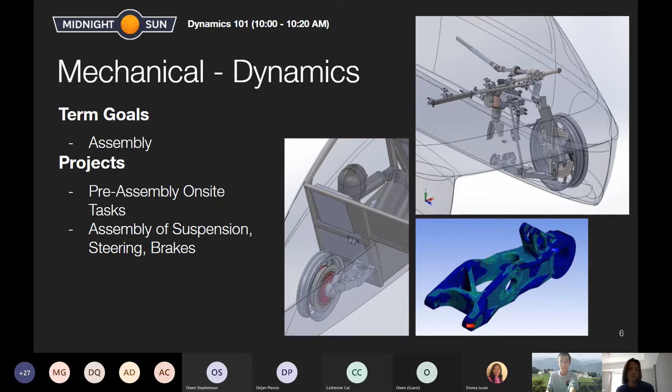I'll provide a brief overview of the 3 subsystems I mentioned, starting with suspension. What is suspension? It's a mechanism that controls the movement of the wheels vertically using linkages and a spring damper. The spring stores the impact temporarily and re-releases it, and the damper takes the kinetic energy from the bump and transforms it to heat, so your car isn't just bouncing up and down all the time.

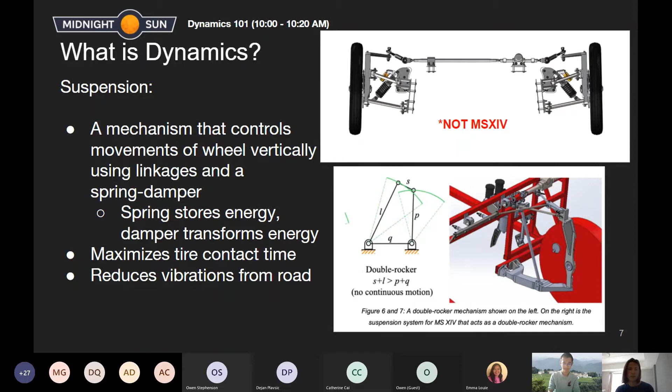We can go on to the next slide.

So then steering, obviously, is important for obvious reasons—it controls the direction of travel of the vehicle. Basically, the steering subsystem is just a long series of linkages of interconnecting arms, quite similar to the animation shown in the top right here. It uses a rack and pinion and then linkages to transform the rotational energy of the steering wheel into rotation of the wheels themselves.

The geometry of the steering is calculated in such a way to get hopefully as close to an ideal turning radius as possible. The mathematics behind it are actually a bit more complicated than you might intuitively think, because the outside of the car has to travel further than the inside of the vehicle. So the turning radius, and therefore the amount each wheel needs to turn, is actually different for the inside and outside wheel, and the linkages are put together so that everything gets as close to that as possible.

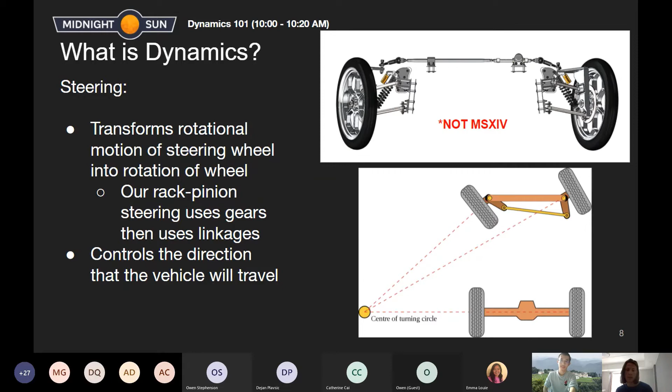And then the braking system, I think that's fairly straightforward. Unlike the steering and suspension systems, it's not just a series of linkages. There's a pedal that you press down, and that pedal is essentially pressurizing a hydraulic hose, and that hose allows the calipers to clamp down on the brake disc, which slows down the car. It's fairly straightforward, but there's some math that goes into ensuring you can push down on the brake pedal with enough force to stop the car, and that the brake calipers are suitably sized to stop the vehicle.

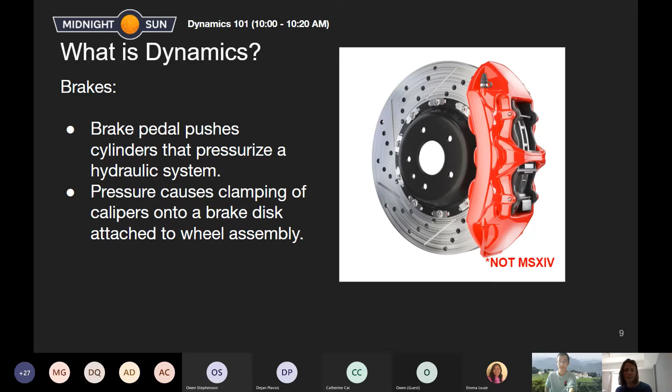So, but yeah, that pretty much sums up dynamics. There's not a lot more to go into, I think. I'm not actually sure what the next slide is—we could have a peek. Okay.

Here's a picture of our steering and suspension assembly on the right, without the chassis or anything, enclosed in the aero body. You can see there's a lot of components. A lot of these—basically all of the larger components you see here—are components we've designed ourselves. Then some things are designed ourselves and had machined, or made from tubes that we've purchased. Some of the smaller components, all the fasteners and everything, we've purchased. But for the most part, it's entirely custom designed by people here on the team. As you can see, it's a fairly complex assembly—there's a lot to put together.

So yeah, we still actually do have a few parts being made, although the design and everything is complete. We're basically finalizing all of our plans and putting everything together. There are still some small on-site tasks, the pre-assembly tasks I mentioned earlier—some small machining tasks, some welding jigs that need to be made. What do I mean by welding jigs?

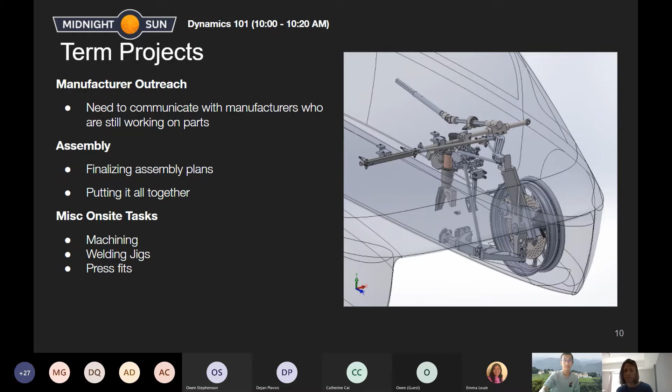I don't know, we can maybe give it a couple minutes and then move on to structure or something, if that's next. Maybe we're gonna have to stall for time. I think Min's running a bit late. He might make it exactly 10:20. Okay, all right, all right.

Oh, you have a question? How many people are on the sub team? Loosely defined, I don't know, we don't really have an exact roster. I'd say usually on a term, for the past little while, once the major design phase is over, we've had sort of 5 to 6 people who have helped out during the term, maybe a bit more than that.

I think a lot of what we're looking for, you can drop in and just take on a very specific small thing. A lot of the pre-assembly tasks are very self-contained, and so in the past little while we've had people kind of drop in, do a small thing, and then go out.

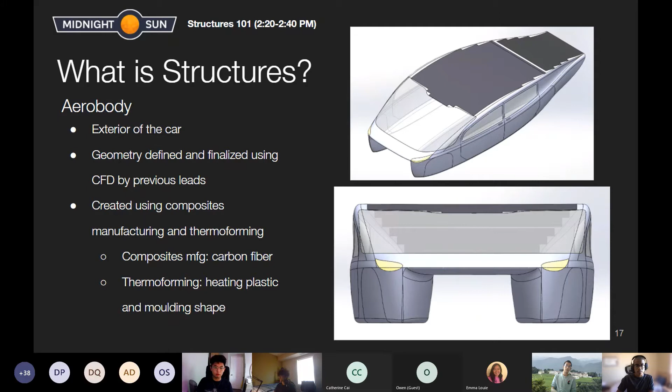So I'm in charge of the actual manufacturing side of it. This entire aero body is created using composites manufacturing. All of the body panels on the car, except for the clear panels, are made from carbon fiber sandwich panels. The clear panels are just made from thermoforming. Next slide.

Am I talking about this as well, Catherine? Sorry, I just stepped out for a bit. If you don't mind, just brief over chassis as well. Okay, I will try my best. I'll help you, don't worry. If I say anything wrong or stupid, just cut me off.

The chassis is the structural skeleton of the car - it's basically what handles all of the loading in the car. The governing body, the organizers, ASC, the American Solar Challenge, gives us a list of criteria in terms of what our car needs to be able to handle to be considered safe to put people in it. The chassis is responsible for absorbing all of those impacts and keeping our passengers safe. It's also the mounting point for pretty much every assembly at this point, so all of the dynamic stuff is all mounted on there.

All of the aero body panels are pretty much all also mounted onto the chassis, which I think Mohammed will be talking about later.

This whole thing, unfortunately, we didn't get to put a picture of it in this slide, but it was in the first general. The full thing is welded and sitting in our bay area right now, so it's pretty cool.

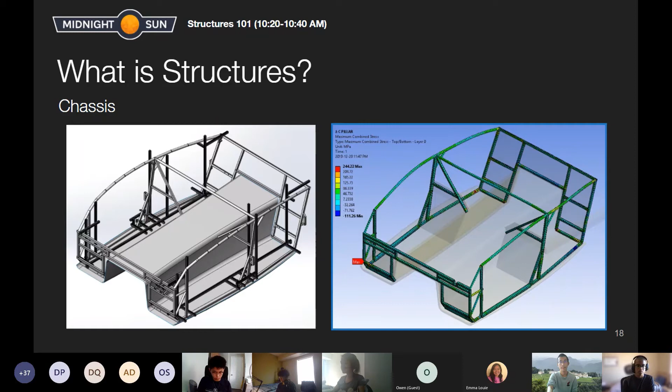Okay, moving on. I think this slide is pretty similar to the first general. I think it just goes over our term goals.

The big ones on the aero side are: we want to learn and master resin infusion, which for those of you at the general, I mentioned as manufacturing research. Basically resin infusion is a separate technique that Michael will talk more about, that's more cost friendly and a lot more student team friendly for us. It's a priority for us to learn and master it because we're going to be using it to create the rest of the car.

I'm going to be working on the manufacturing of the roof, hood, and trunk panel, as well as the bridges. I don't have pictures of the bridges unfortunately, but I think the roof, hood, and trunk are pretty self-explanatory — there will be pictures later.

Not sure how accurate complete material testing is because I think that's been put on the back burner, but regardless, I think there has been work done for it.

I think projects and term goals are pretty similar, but most of the stuff we work on primarily revolves around composites manufacturing and how we can make it better, as well as the chassis side. There's more mechanical design, and I think maybe some FEA. Maybe Mohammed will dive into it more deeply, but I'm not 100% sure.

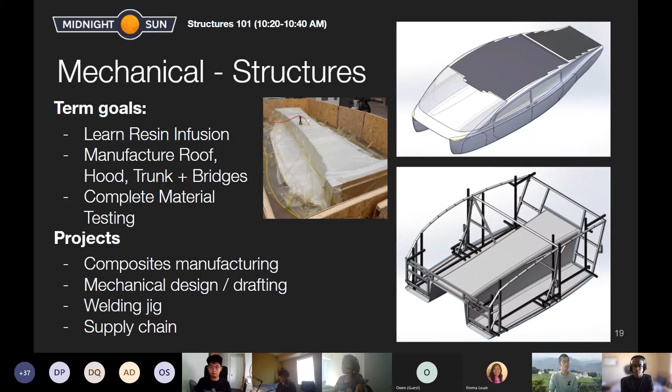Next slide. Our goal: rolling chassis. Yeah, I think that is our term goal.

Catherine mentioned the bottom panel, which is that giant channel thing underneath the chassis. So we want the bottom panel integrated with the chassis, as well as all of the dynamic stuff mounted onto the chassis so that you can just kind of roll around this big boat looking thing.

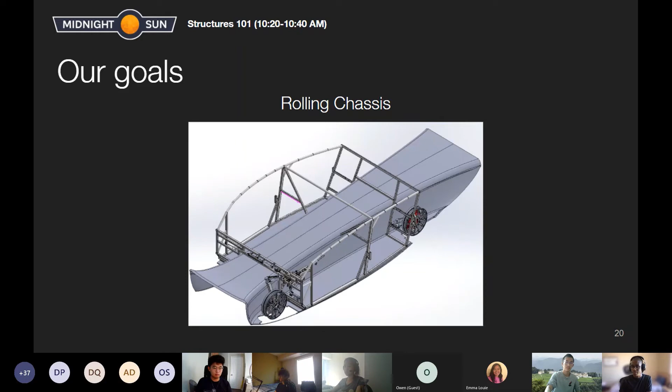Cool. All right, I think this is Michael's slide, so I'll let him talk. I made updates to this. Oh, it's sad. All right, I'll just look at the updated one on my side.

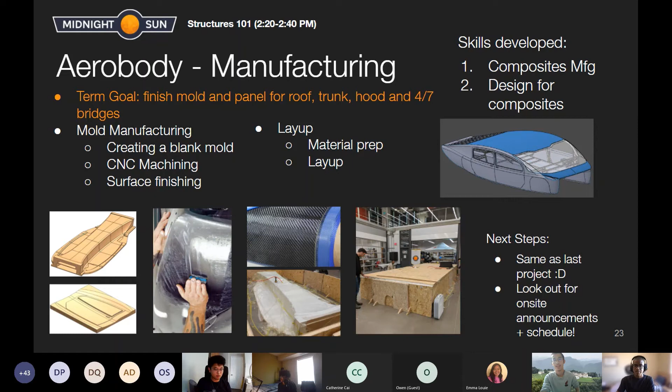Yeah, but that's pretty much it for the slide, to be honest. I guess it's good timing. Should I answer that question right now or later? How many slides do you guys have left? Wait, one, you don't need to talk about this. You can answer in the chat. Oh okay, cool, I'll do that. I don't think we need to save this slide because it's basically finished.

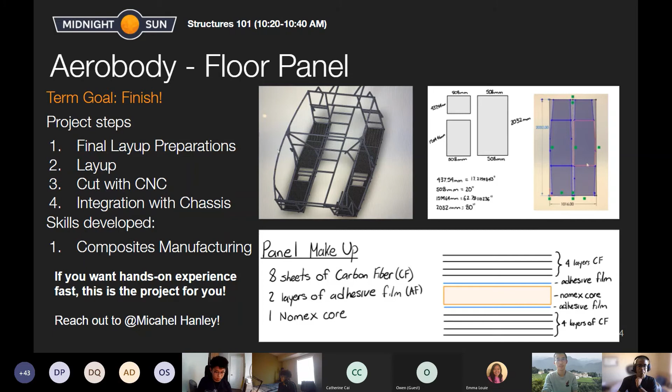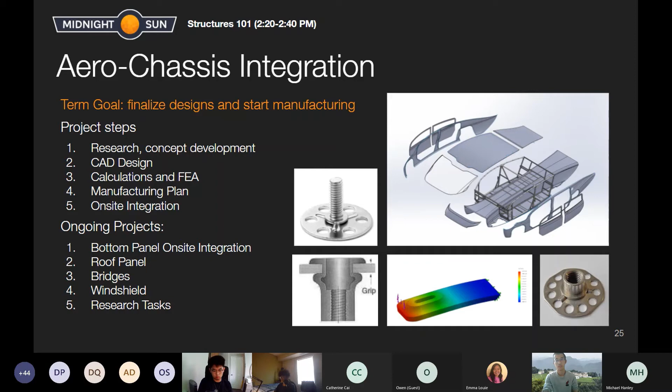Do I get this or does Catherine get this? Because I don't really know what's going on with this slide. This is my fault, I forgot to take the slide out.

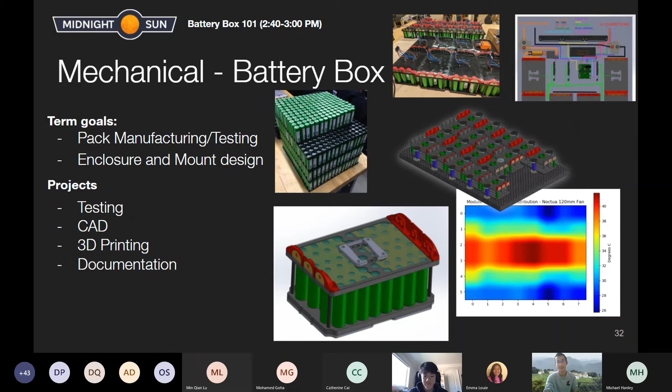The battery box is the main energy storage in the car. It gives the car energy to move, and we have about 11 kilowatt hours of energy stored in the pack. It's a lithium-ion battery pack comprising 900 cells, and they're 18650 cells. We run the battery pack at a pretty high voltage of 150 volts DC, so there are a lot of safety factors to consider, and these considerations give us a safer and more reliable pack.

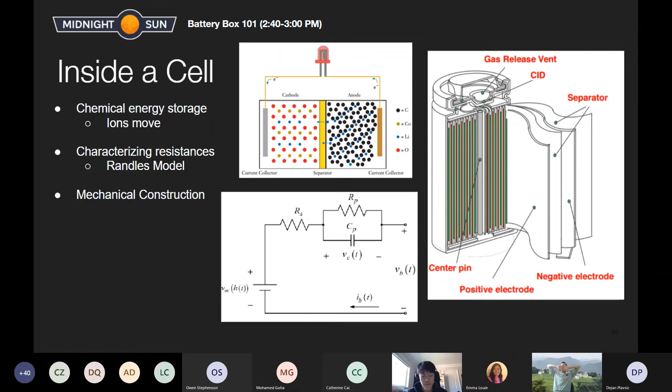So what the cells are not able to protect themselves against is thermal runaway. If the cells are damaged internally, a lot of current can go directly between the cathode and the anode, and this is called an internal short. The high current causes a lot of heat and the cell will explode. That cell exploding will also trigger the cells next to it to heat up and explode as well. So when a cell reaches a certain internal temperature and surpasses its activation energy and explodes, that's called thermal runaway. We need to be careful in meeting manufacturer precautions and designing the pack in the safest way possible to avoid this. Another concern is that the pack is high voltage, 150 volts, which is not safe to touch, and this is why we design enclosures to cover the high voltage components.

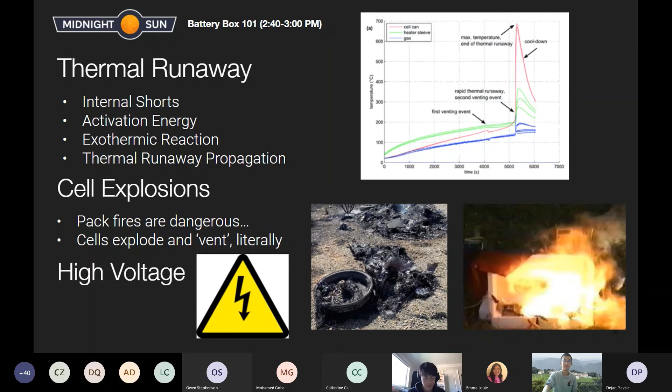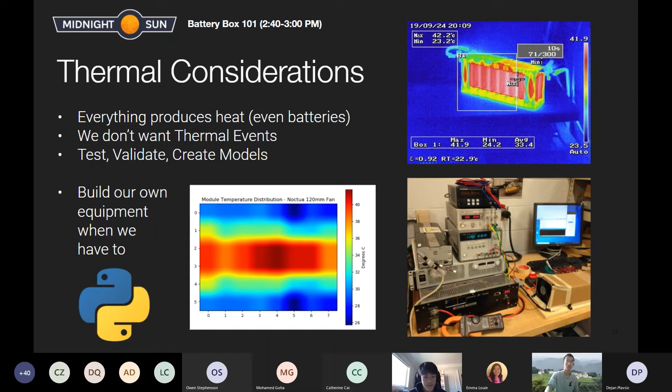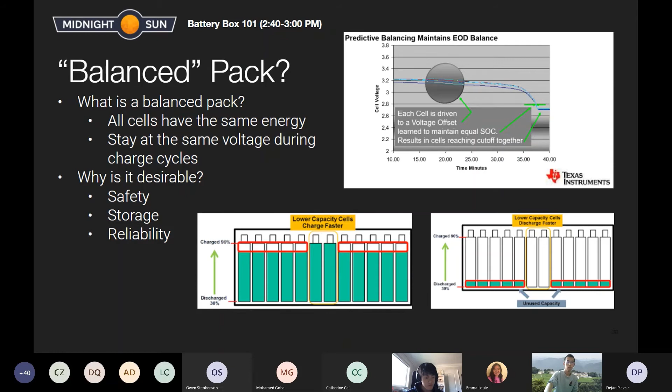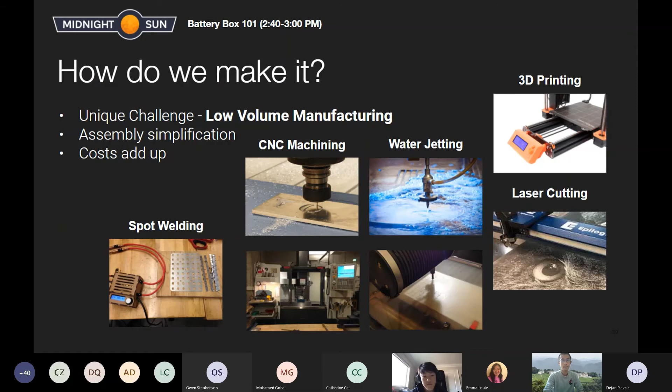That might have been information overload. I definitely felt that way when I was a first year, but if you invest some time into reading documentation, asking questions, and jumping into tasks, you'll start to piece things together pretty quick. If you're interested in Battery Box, join our Slack channel and feel free to ask questions there. There are also some Confluence pages that go into more depth on what I talked about in this presentation.

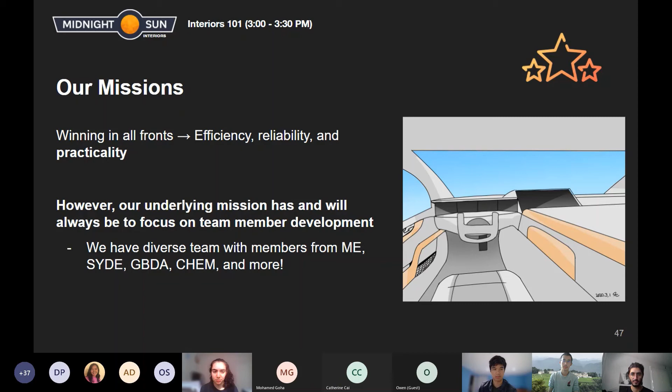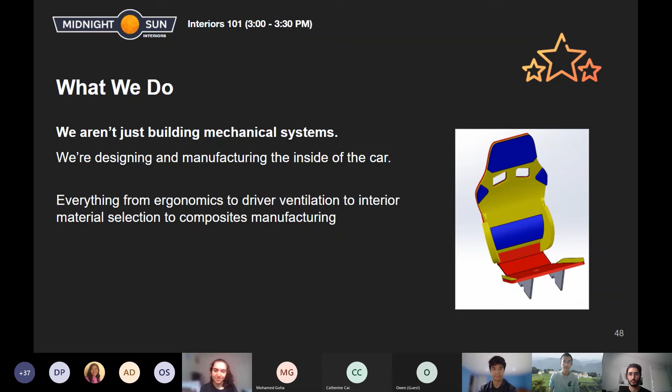Okay, so why have an interior team? Like I said before, past solar vehicles were single-seater, and the main focus was on efficiency and basically speed, see how fast you can finish the race. With the addition of the cruiser class to the American Solar Challenge,

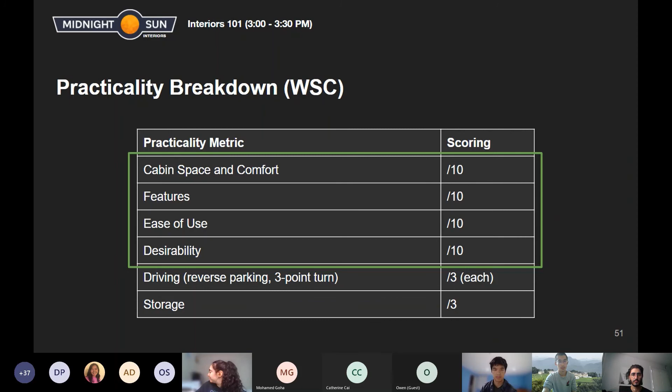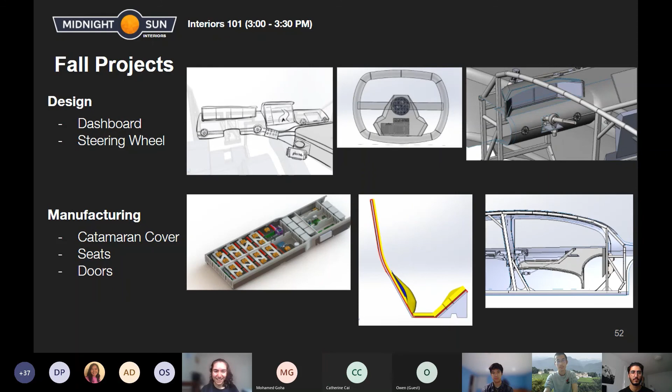It's basically the enclosure that holds the battery box, and it will be made mainly of fiberglass outside because we don't want things catching fire, and fiberglass is non-flammable. We'll be manufacturing using the infusion process. We also have seats and doors — I'm one of the DRIs on seats. We'll be using carbon fiber, core, and a little Kevlar for those, also via infusion. The team has mainly been working on learning infusion, so if you're interested in coming out and getting hands-on experience with composites manufacturing, we'd love to see you. We've also got a lot of design portion work available, so just let me know.

Yeah, I think there's a little video if you want to play it.

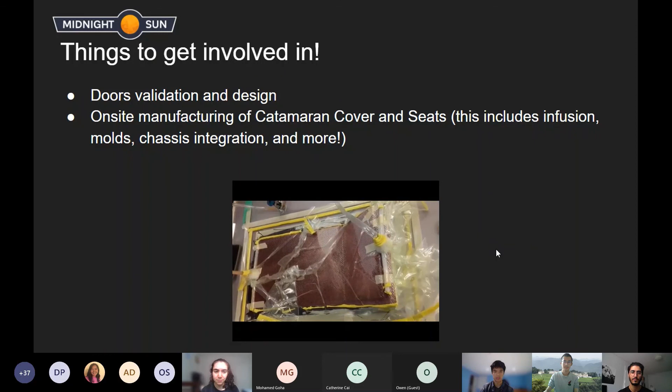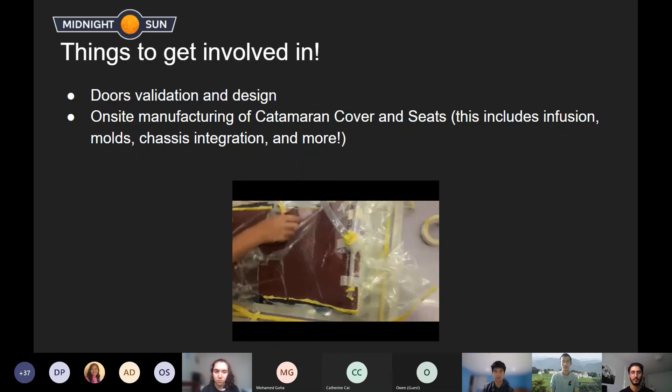This is our collaboration with the Aerobody team to learn infusion, since most of the knowledge we had on infusion kind of got lost, so we're trying to regain some of it. We're working on figuring out how to infuse panels — this is the second test piece Michael was talking about. If we can get this process down to a science, we could apply it to all the other panels pretty easily. So if you're interested and on site, this would be a great hands-on experience.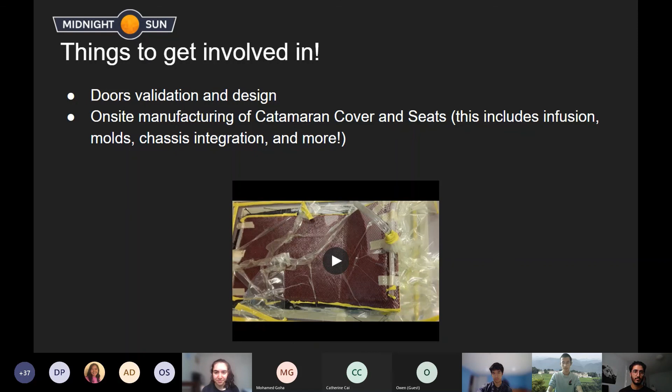Also, for anyone not on site or working remotely, there's a lot of CAD design and miscellaneous tasks you could get involved in. Right now in interiors I'm working on the dashboard and steering wheel, so one task anyone could get involved in is the steering wheel enclosure modeling — we're in the prototype concept phase, so there are lots of small CAD tasks. If you're new to SolidWorks and want to start learning, definitely reach out and join the interiors channel. There's a lot of things to do even if you're remote.

Our toolkit is basically the same as all the other mechanical subteams. We use Slack, Confluence, SolidWorks for our modeling, and GrabCAD for sharing our 3D files.

There's also a Trello for some of the sub-teams of interior.

Next steps: just like everyone else, please add the Solar UW Midnight Sun calendar. In terms of Slack, the channel is Mech Interior, and we also have our own Confluence section, so feel free to take a look. Interiors meetings are weekly at 7:30 on Wednesday, right after general meetings, so come up to those.

Onboarding sessions will be happening with Mech, so regardless of whether you're interested in structures, interiors, or Aero, you'll all be doing the Mech onboarding project.